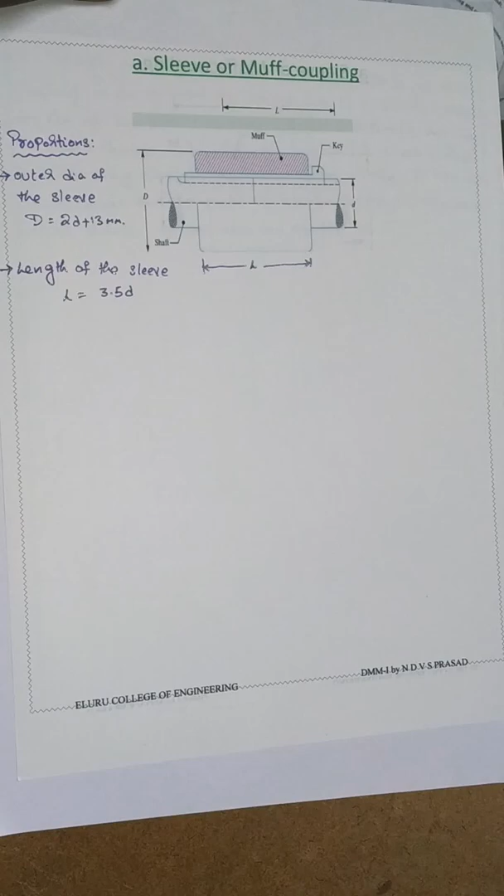Hello everyone. Today I would like to discuss sleeve or muff coupling. Here is the diagram of sleeve. This is called muff or sleeve.

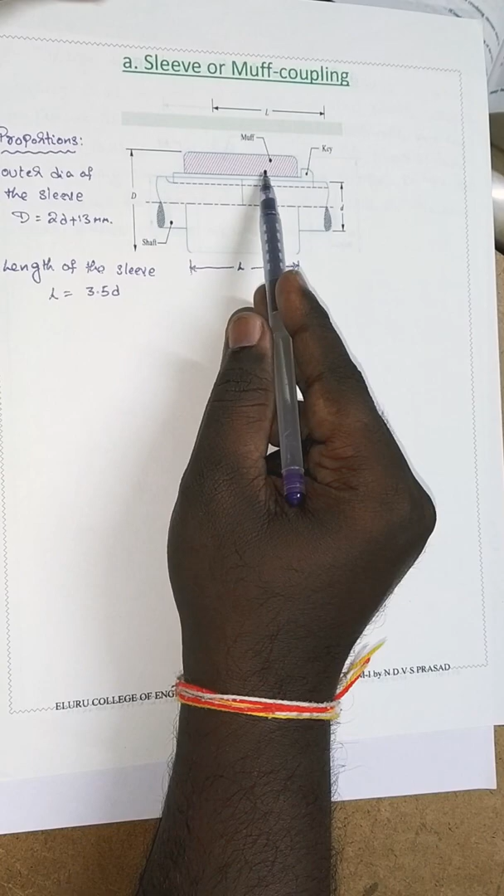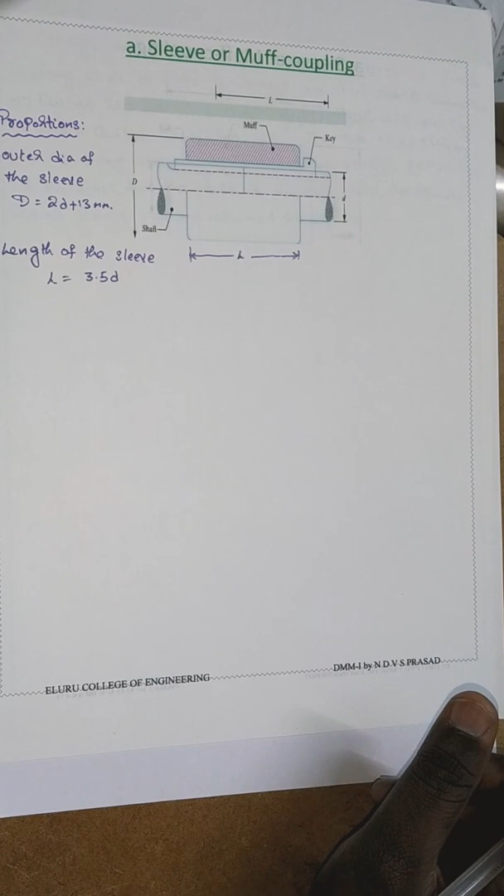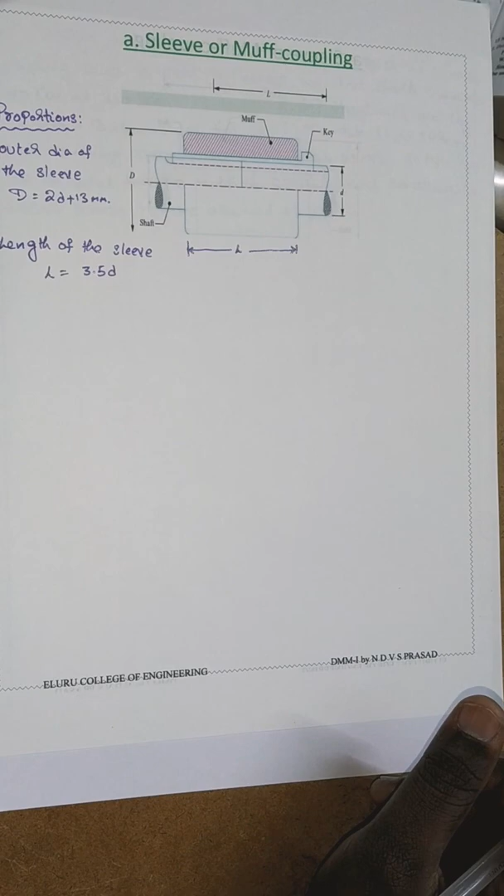There are two major parts. The first is the design part, the second is the verification part. In design part we have to design shaft, sleeve and key. After design is over, we check that the stresses induced in the key are less than or equal to the given allowable stresses. If the values are less than or equal to the given values, the key design is safe. The sleeve coupling is the simplest type of rigid coupling, made up of cast iron.

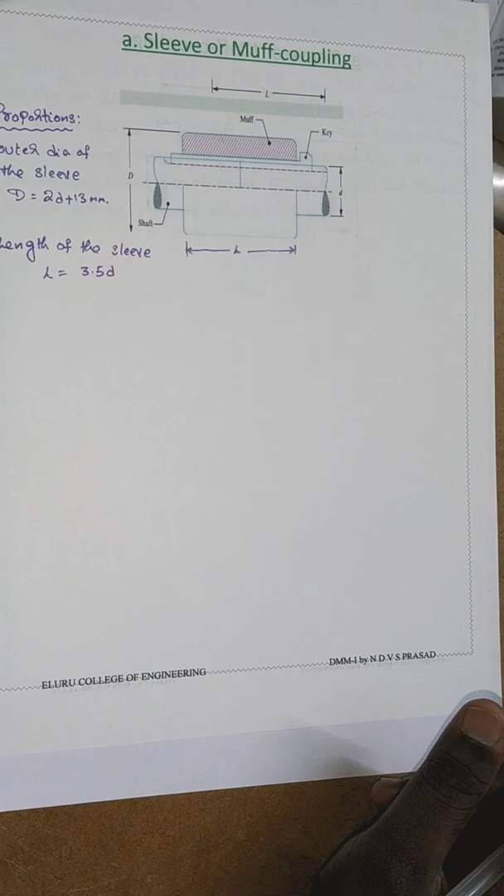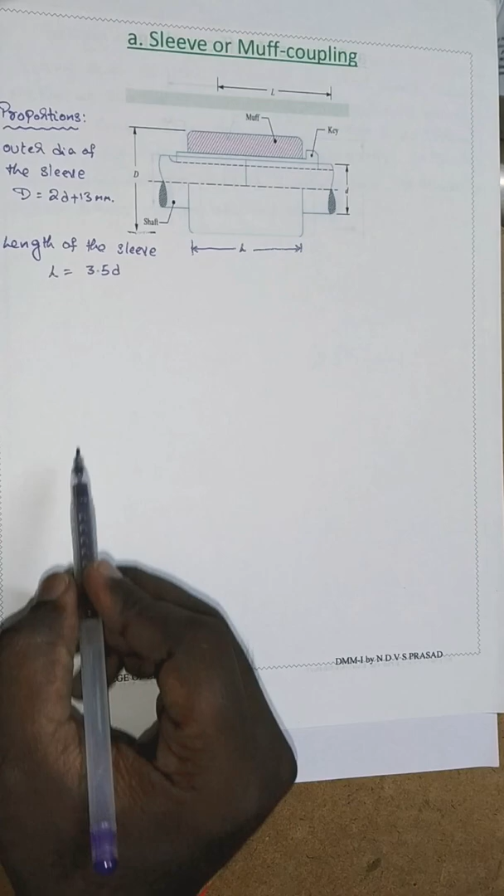It consists of a hollow cylinder whose internal diameter is same as that of the shaft. These are the proportions. The outer diameter, from here to here, capital D is equal to 2d plus 13. The length of the sleeve, L, is equal to 3.5d.

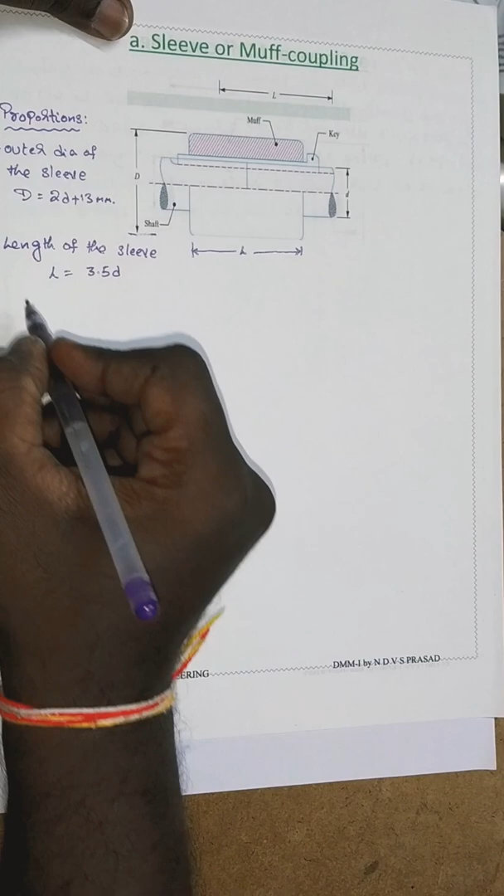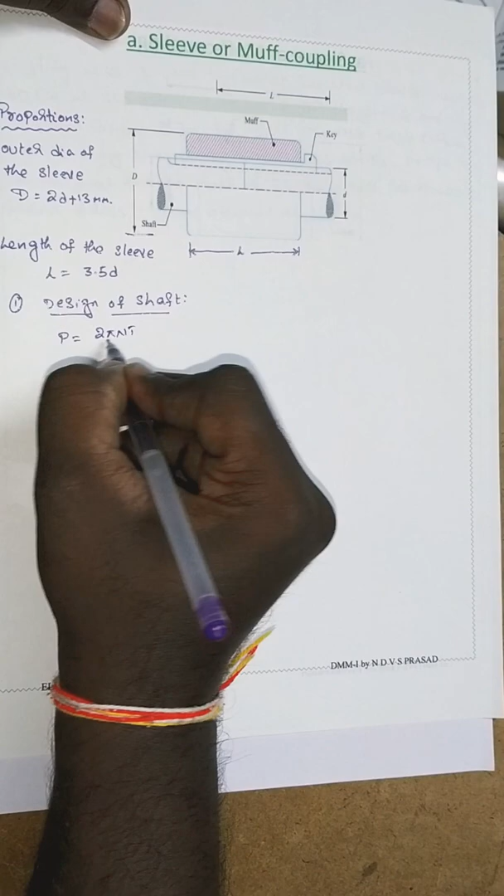First we have to design the shaft. We know the power equation: P is equal to 2 pi n T by 60. From this equation, we calculate the torque: T equal to 60 into P by 2 pi n.

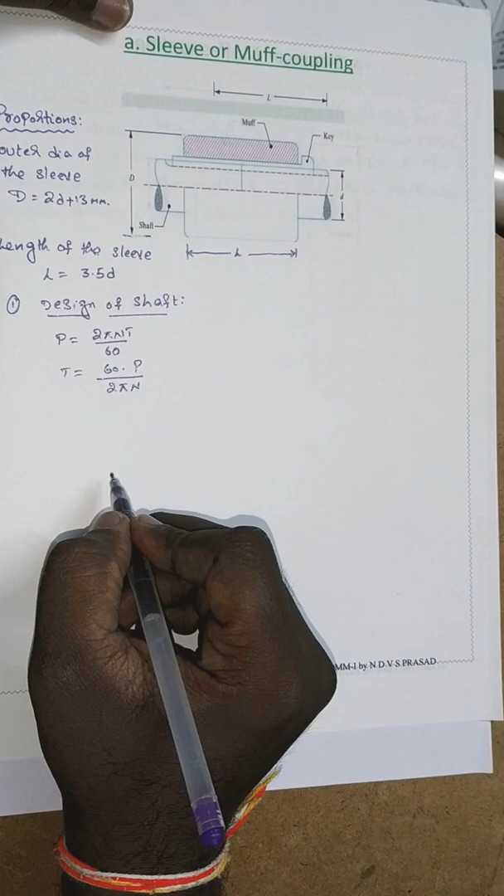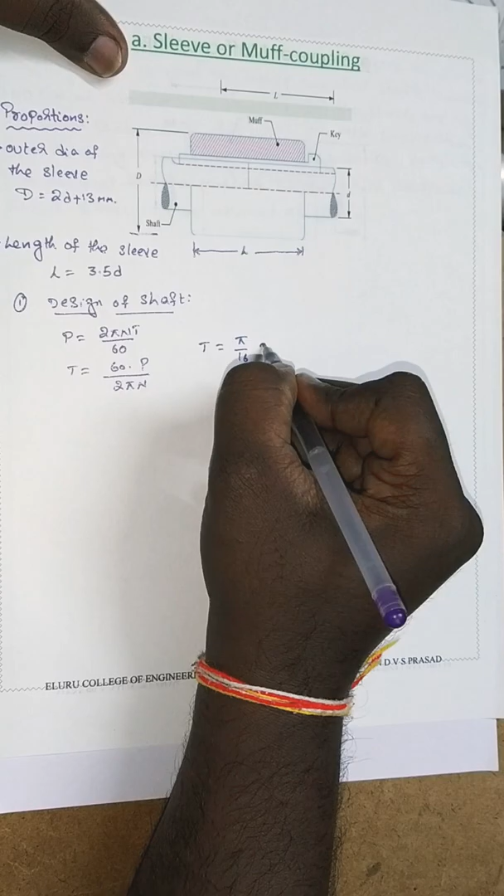We know the equation of torque transmitted by a solid circular shaft: T is equal to pi by 16 tau d cube, where d is the diameter of the shaft. From this equation, we find the torque value.

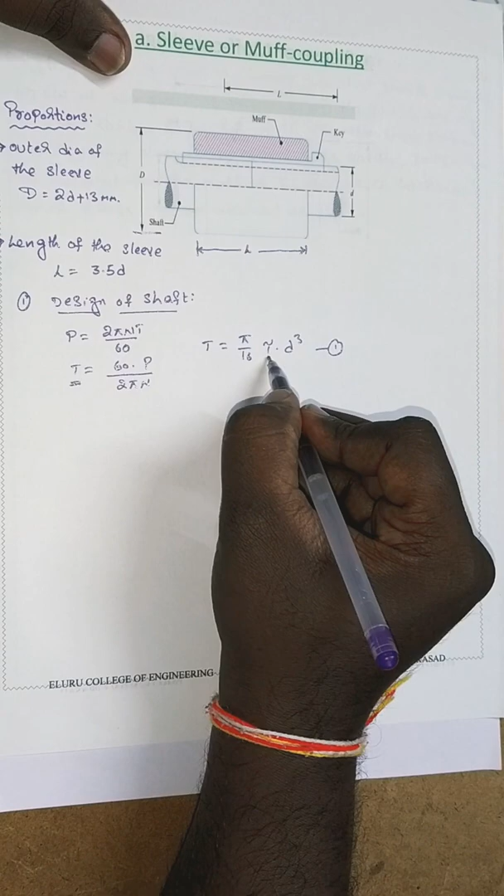After getting the torque value, substitute it in this equation to find either tau or d. While calculating problems, if tau is given, we find the diameter; or if diameter is given, we find the tau. This is the procedure for design of shaft.

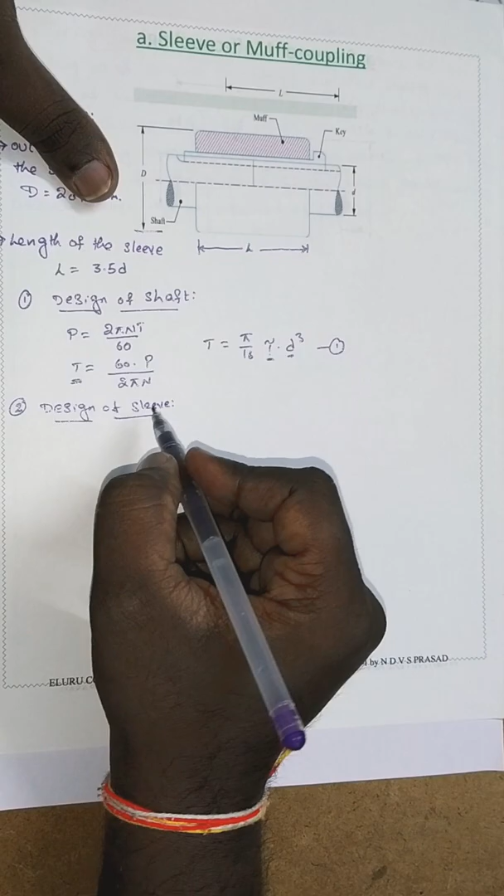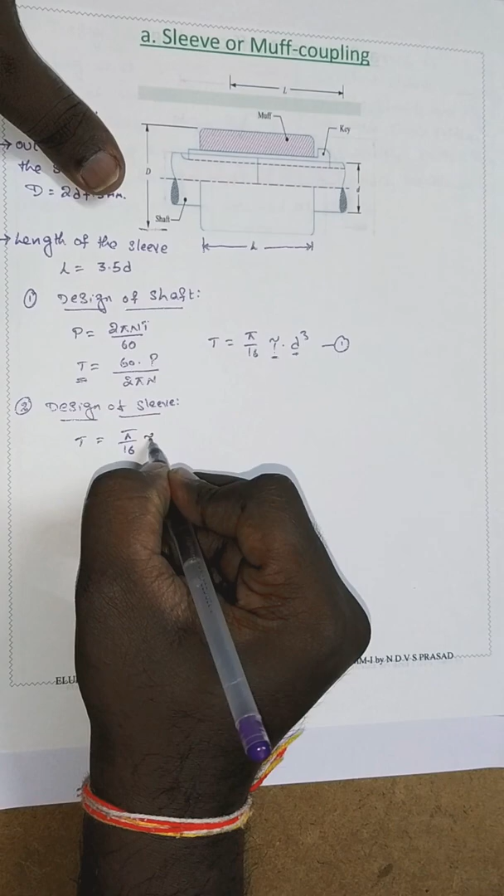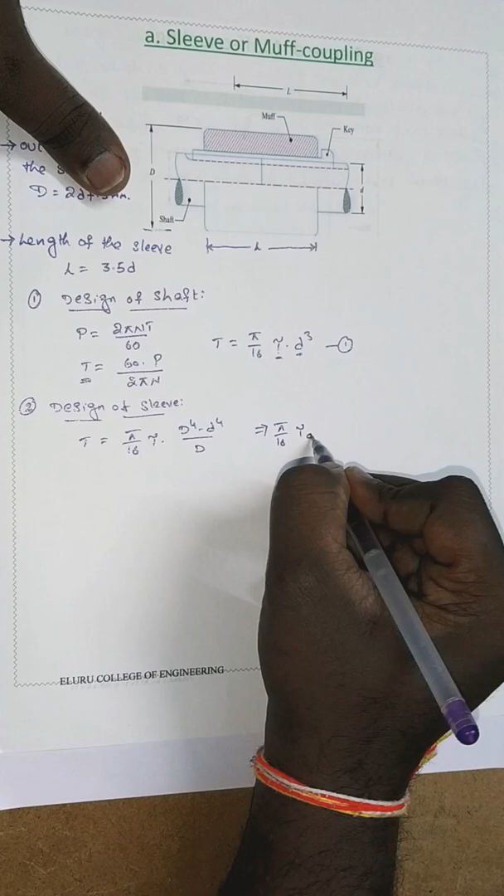Coming to design of sleeve. The sleeve is assumed as a hollow circular shaft. We know the torque equation for hollow circular shaft is pi by 16 tau (D power 4 minus d power 4) by capital D. In some textbooks this is written as pi by 16 tau capital D cube into (1 minus k power 4), where k is the ratio of small d by capital D.

In the problem, sometimes the k value is directly given. We simply substitute the value.

Next, design of key. The design of key is done by simply taking the proportions: width is equal to d by 4, thickness is equal to d by 6, and L is equal to capital L by 2, which is nothing but 3.5d by 2. Using these proportions, we find the key design.

From here, the design part is over. Next is the verification part, which is basically of two types: one for shearing, second for crushing. So check for shearing.

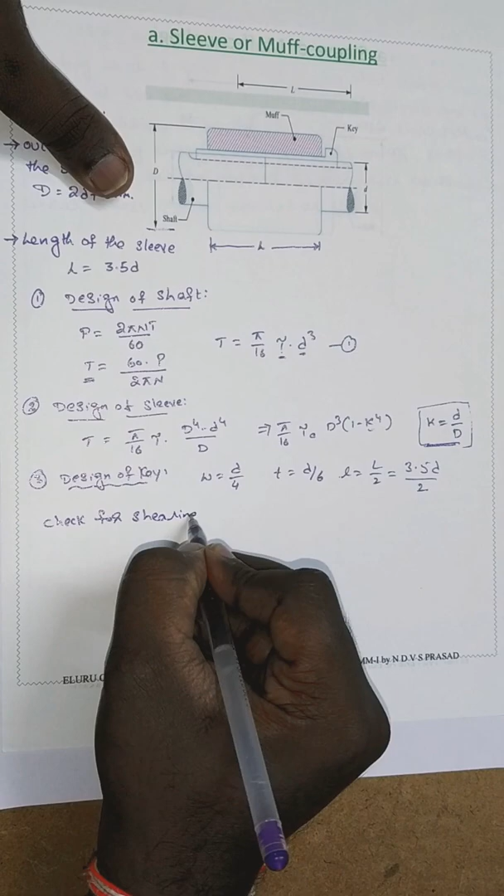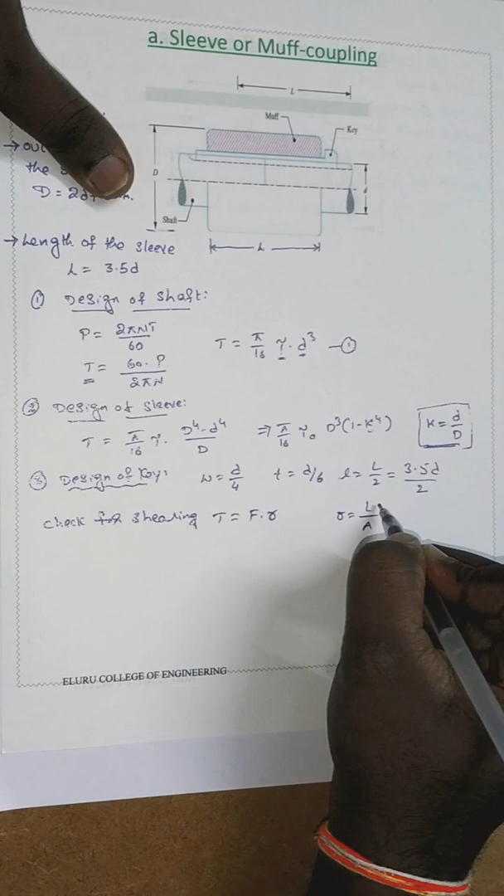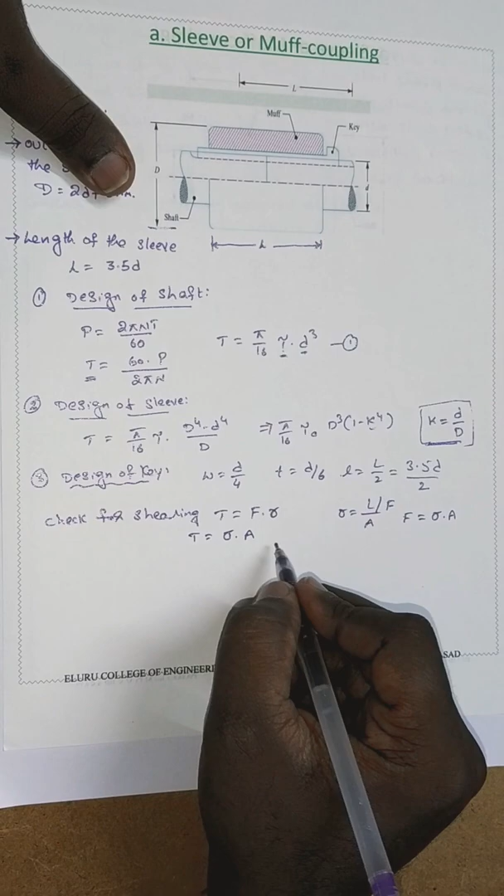Check for shearing. Generally, the torque equation is equal to force into radius. We know stress equal to load by area, or force. From this we get force is equal to stress into area, so T equal to stress into area. Here, stress is called the shear stress.

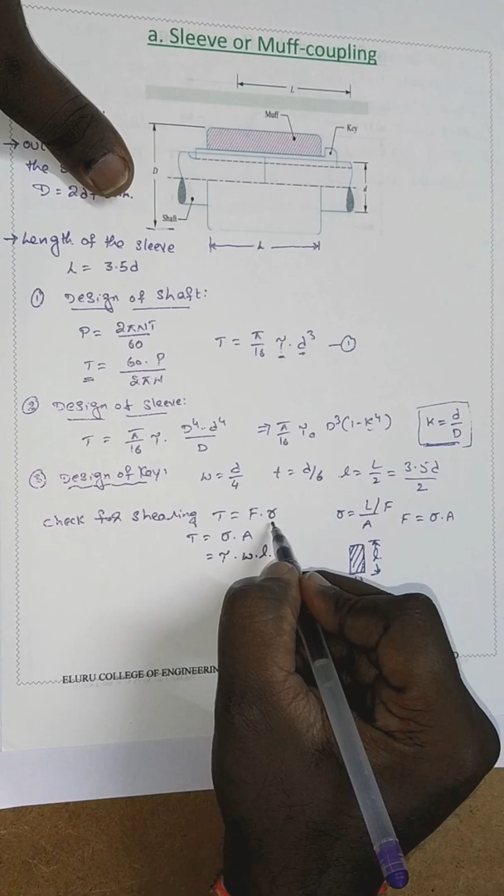Coming to area, the key element is here, with cross section like this — this is the width and this is the length of the key. This area will be affected while shearing. So the area is W into L. Coming to R, that is d by 2. So tau W L d by 2 gives the torque.

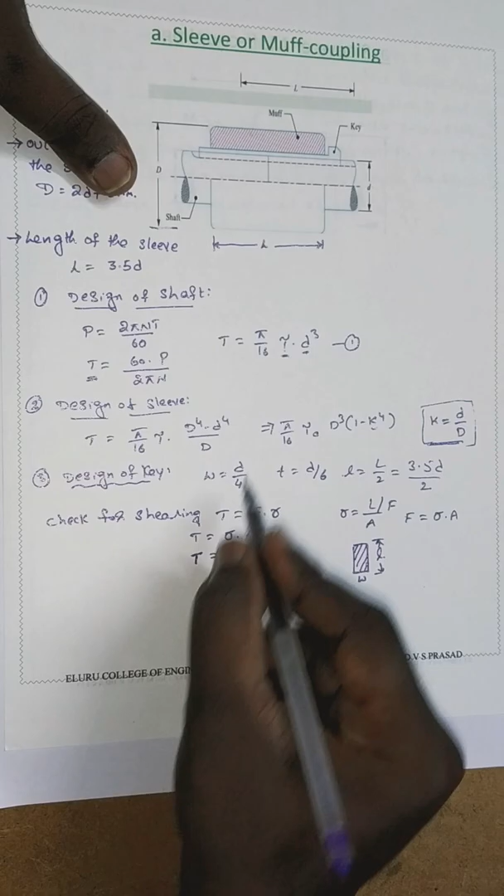The torque value previously found in equation 1 is substituted here. We check tau and substitute the W value, L value, and D by 2 value. The resulting tau value should be less than or equal to the safe permissible or allowable stress given in the problem.

Next, check for crushing. Here also torque is equal to force into radius, and force equal to stress into area — crushing stress into area into R.

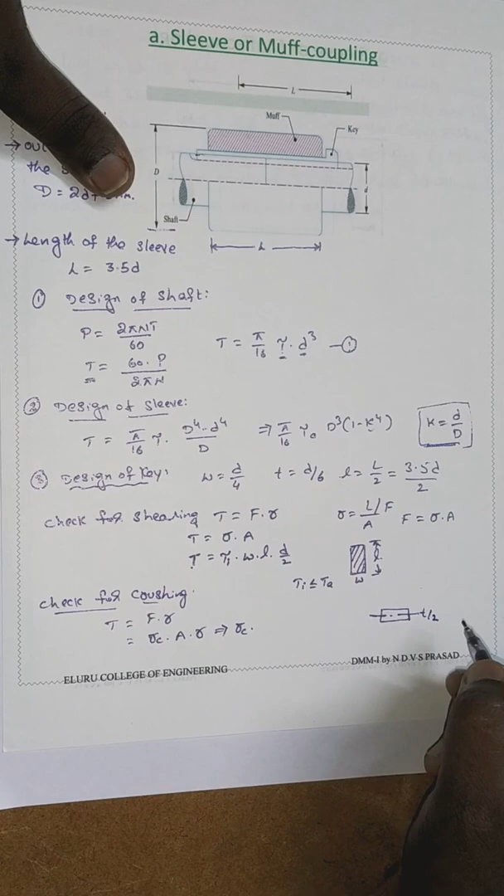Coming to area: the crushing area subjected to load is only half of the portion of the shaft. This is the half. The total value is thickness, but only in the half portion does the crushing area develop, that is T by 2 over a length of L. So the area is T by 2 L, and again R is equal to D by 2.

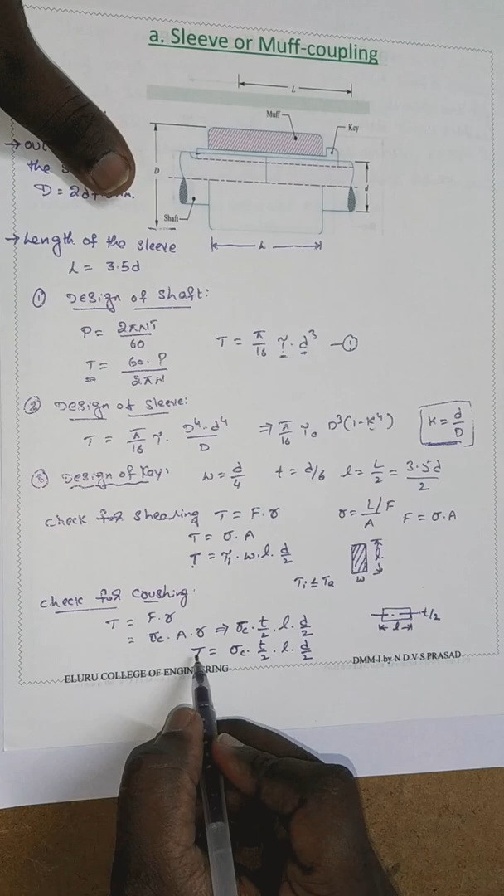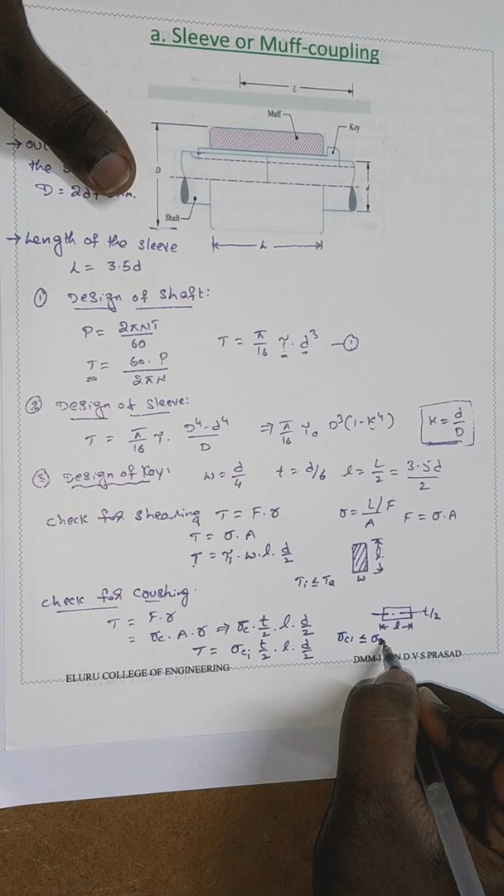Here this is sigma C. So finally T is equal to sigma C into T by 2 into L into D by 2. Substitute the torque value, thickness, L, and D values to find sigma Ci. Sigma Ci should be less than or equal to sigma Cs, where S is the safe permissible stress given in the problem.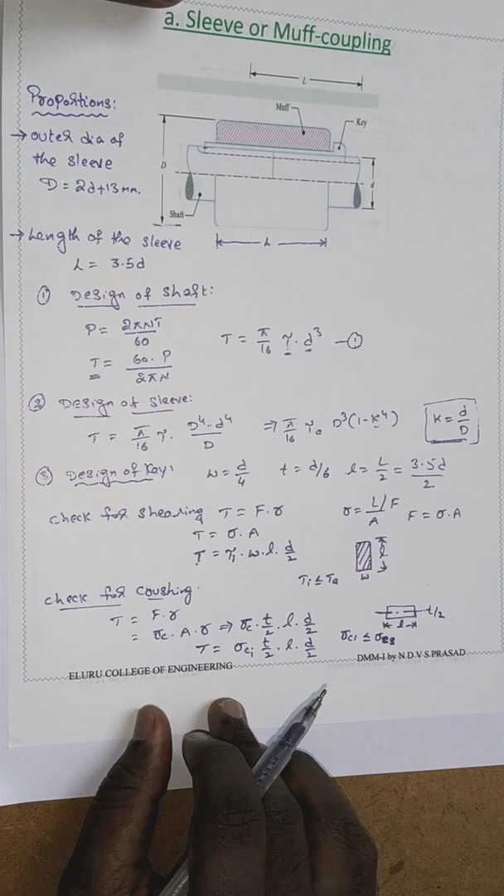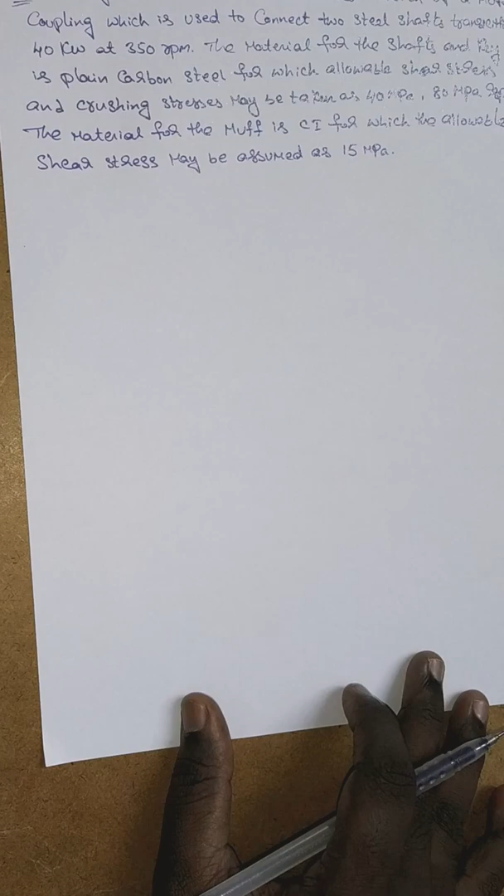Okay, so let us solve one example problem. Here is the problem given: design and make a neat dimensioned sketch of a muff coupling used to connect two steel shafts transmitting 40 kilowatts at 350 rpm.

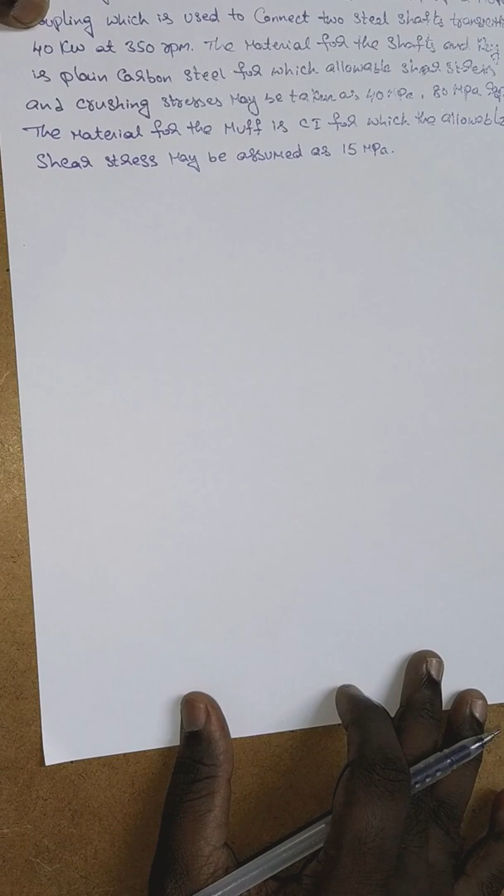The material for the shafts and key is plain carbon steel, for which allowable shear stress and crushing stress may be taken as 40 megapascal and 80 megapascal respectively. The material for the muff is cast iron, for which the allowable shear stress may be assumed as 15 megapascal. First you have to write the given data.

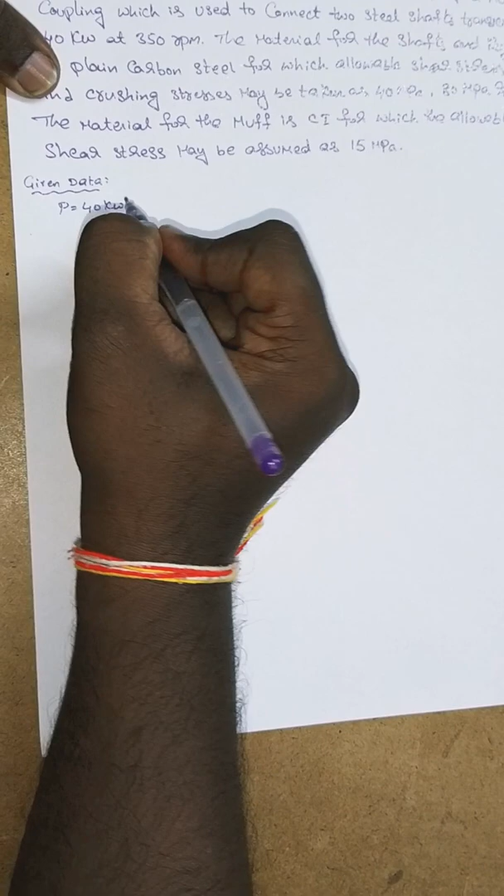Here power is given 40 kilowatt. We have to convert into watts: 40 into 10 cube watts. Speed is given 350 rpm.

Stresses are given: shear stress 40, crushing stress 80 megapascal. We have to convert into Newton per mm square. 1 megapascal is equal to 10 to the power of 6. 1 pascal is Newton per meter square.

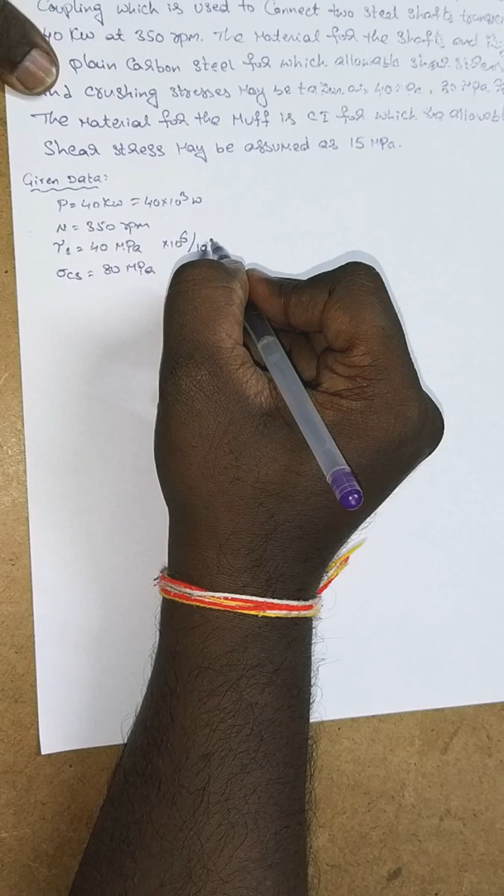You have to convert into meters. 1 meter equal to 1000 mm, 10 cube square, 10 to the power of 6. So directly 40 Newton per mm square, similarly 80 Newton per mm square here.

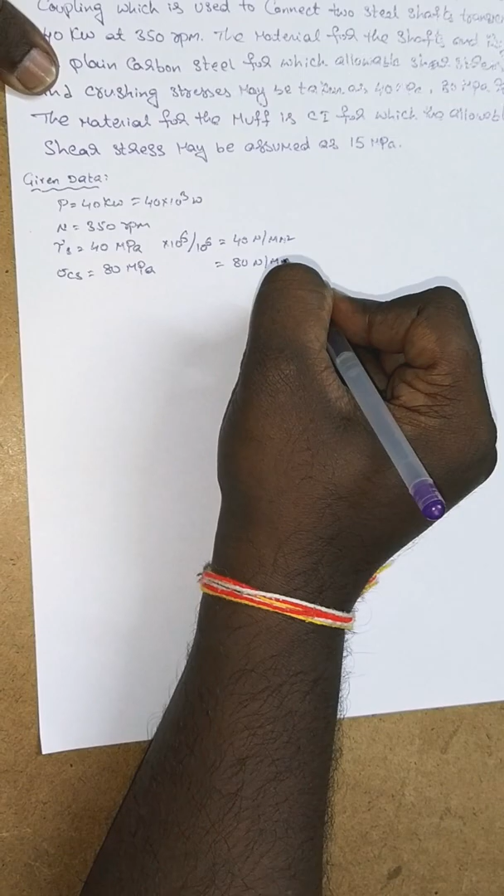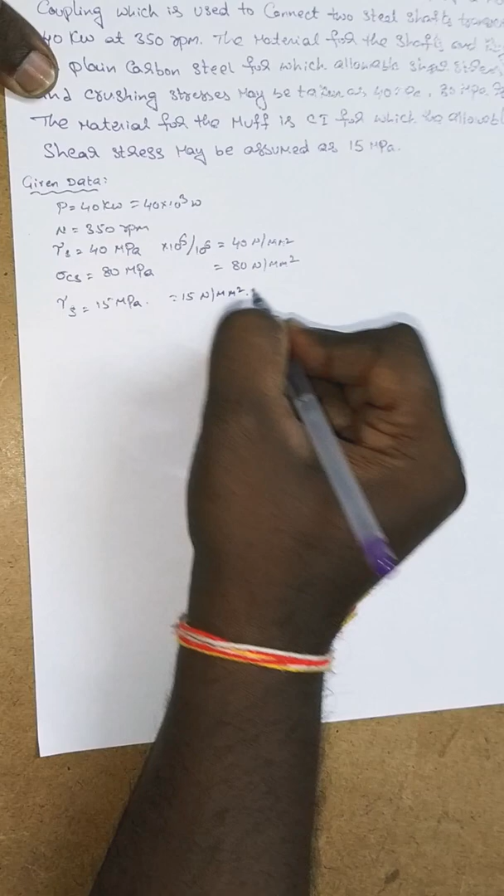And next, the muff cast iron which is allowable shear stress, muff material is given 15 megapascal. This is also 15 Newton per mm square.

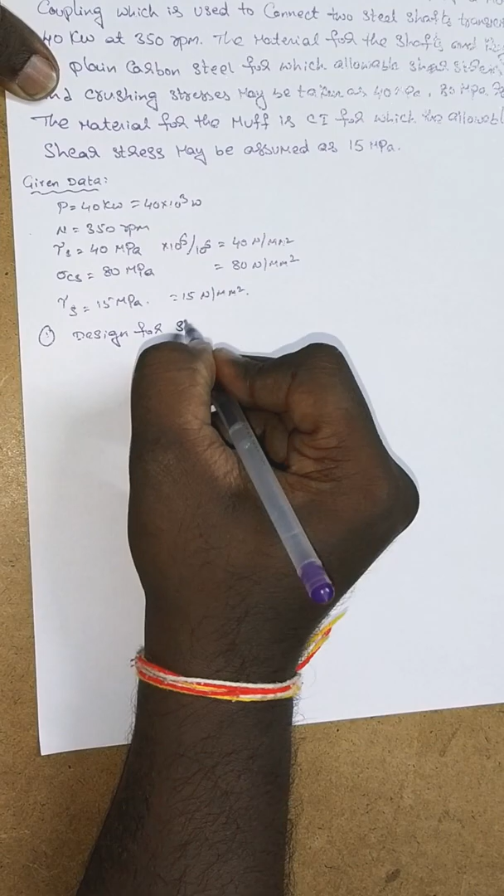So first we have to design the shaft. Design for shaft. We know the equation, torque equation is equal to 2 pi n by 60.

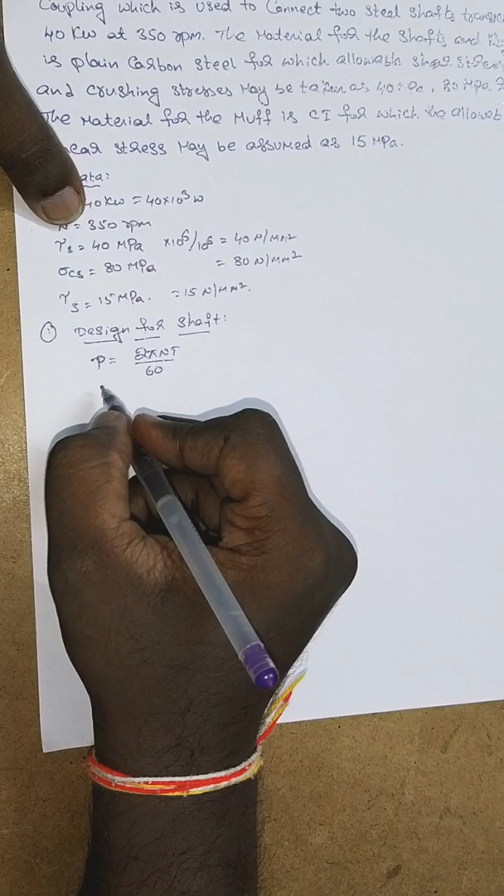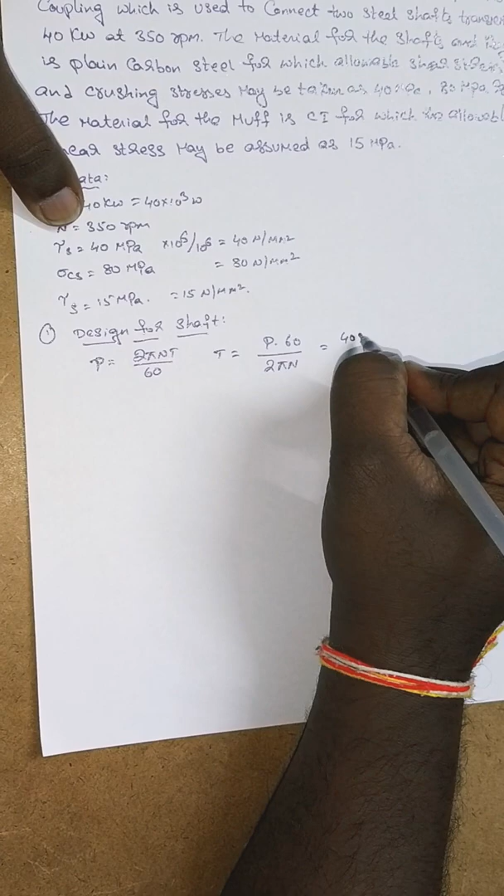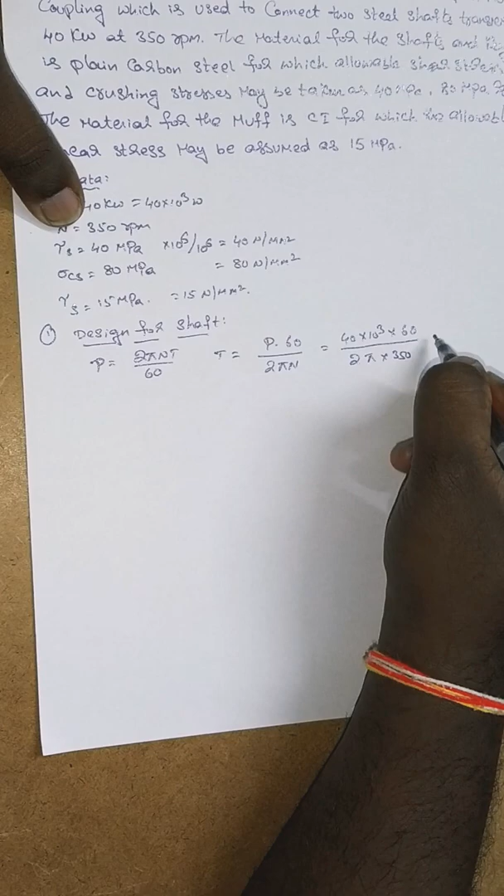Power is equal to 2 pi nt by 60. From this equation we have to calculate the torque: P into 60 by 2 pi n. P 40 into 10 cube, power value 40 kilowatt is given, into 60 by 2 into pi into speed 350 rpm. By calculating this we get

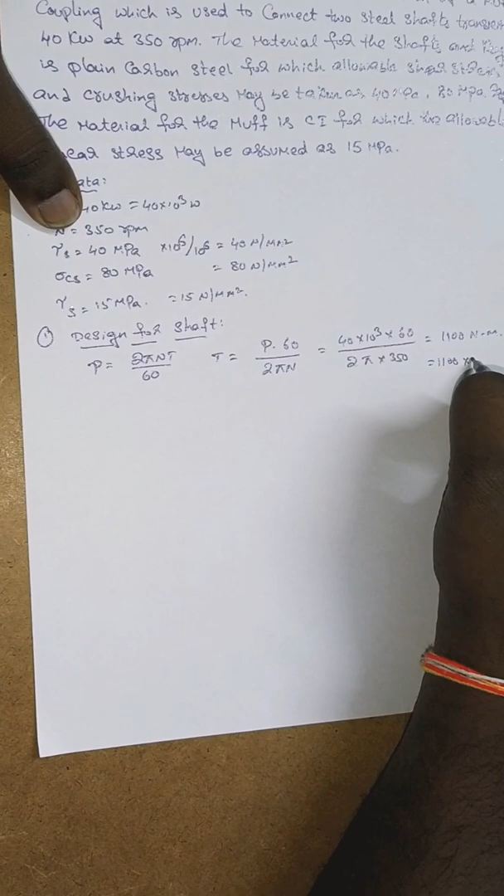1100 Newton meters. We have to convert into mm: 1100 into 10 cube Newton mm.

By using this equation, we have to find the diameter of the shaft. So T is equal to pi by 16 tau s into d cube. Torque transmitted for the solid shaft.

Here the torque value is 1100 into 10 cube is equal to pi by 16 tau s. Here 40 given, 40 Newton per mm square, 40 into d cube. By using this equation, you have to calculate diameter value. D is equal to 52, rounded to 55 mm.

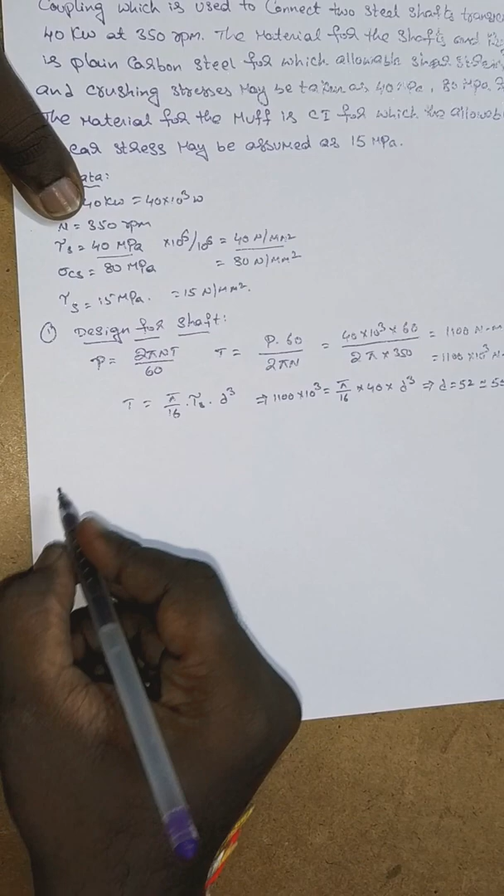Second one is the design for sleeve. Design for sleeve. Here while deriving the equation, we are having the proportions: Capital D is equal to 2D plus 13. 2 into diameter just now calculated 55 mm plus 13 is equal to 123, rounded to 125 mm.

L is equal to 3.5D is equal to 3.5 into 55 is equal to 192.5, rounded to 195 mm.

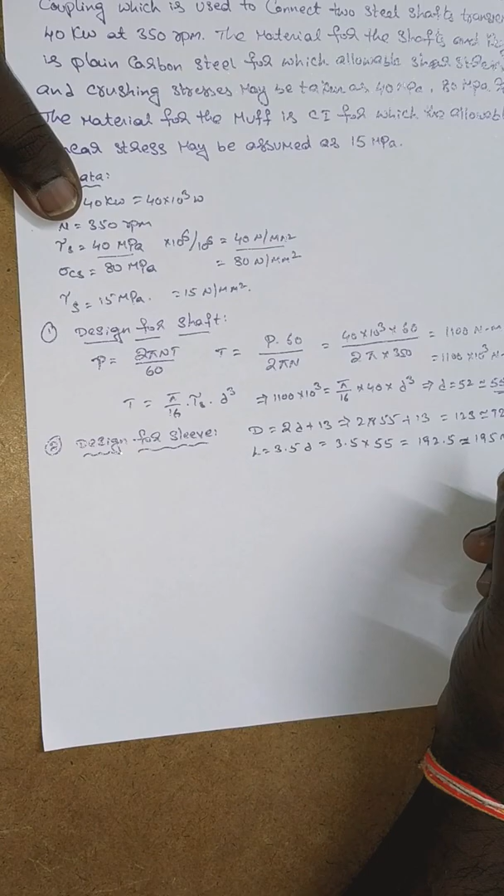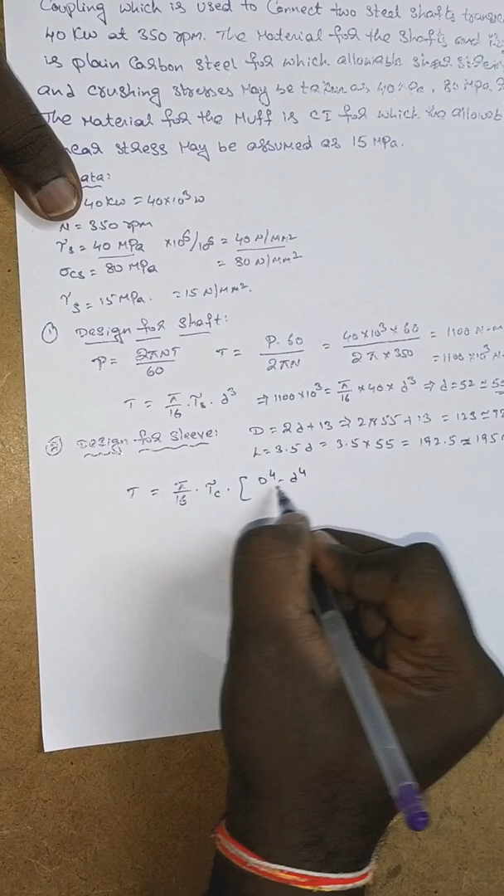Here we have to check the induced stress in the muff. What is the equation here? Torque transmitted hollow shaft, here sleeve. Sleeve assumed as a hollow circular shaft: pi by 16 tau c, d power 4 minus d power 4 by d.

Here the torque value is 1100 into 10 cube is equal to pi by 16 into tau c. Capital D 125, small d 55, by 125. So from this equation you have to solve tau c is 2.97 Newton per mm square.

Here the value is given 15. So this value is less than 15. The design of sleeve is safe.

Next, design for key. According to the standard tables, with respect to the diameter of the shaft, the key values can be taken: W is equal to 18 mm. Here we are having one equation.

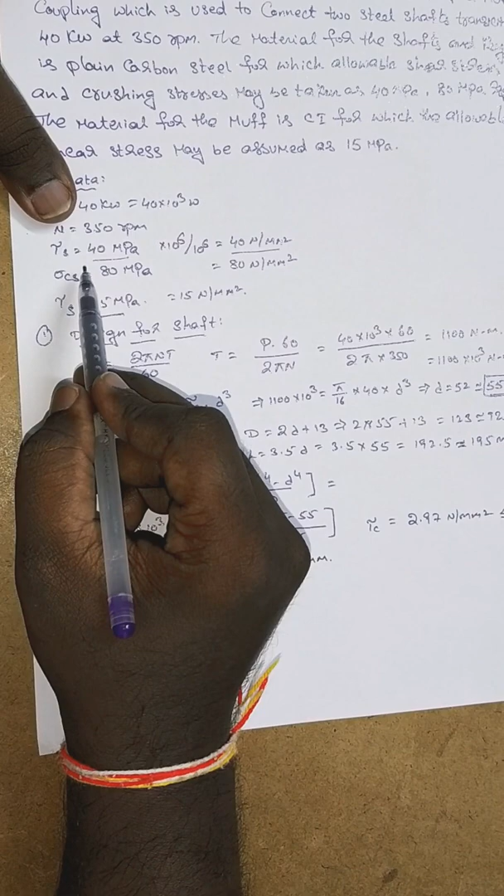The crushing stress is double the shearing stress. So by using these values assumed as a square key, that means thickness is equal to width is equal to 18 mm. L is equal to capital L by 2.

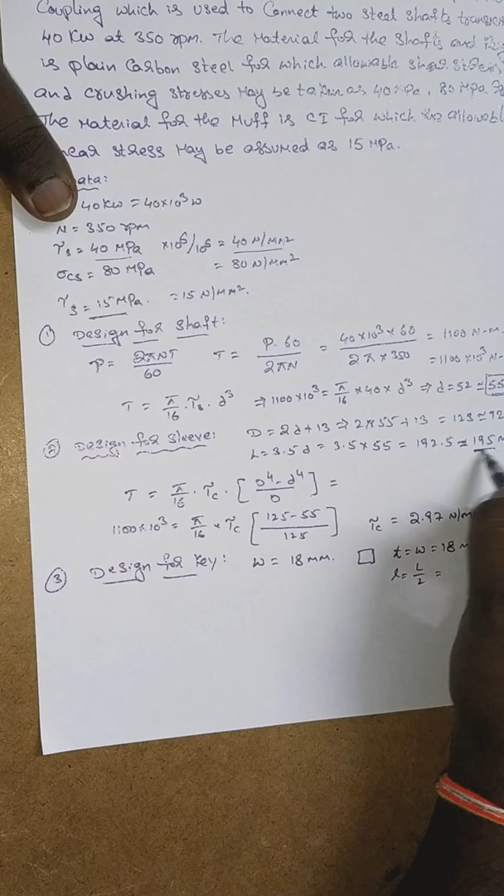So capital L is 195, 195 by 2 around 97.5 mm. So from here the design part is over.

Now verification part. First check for shearing. So the equation is torque is equal to tau into WL into D by 2. So previously we calculated torque value, W, L and diameter value.

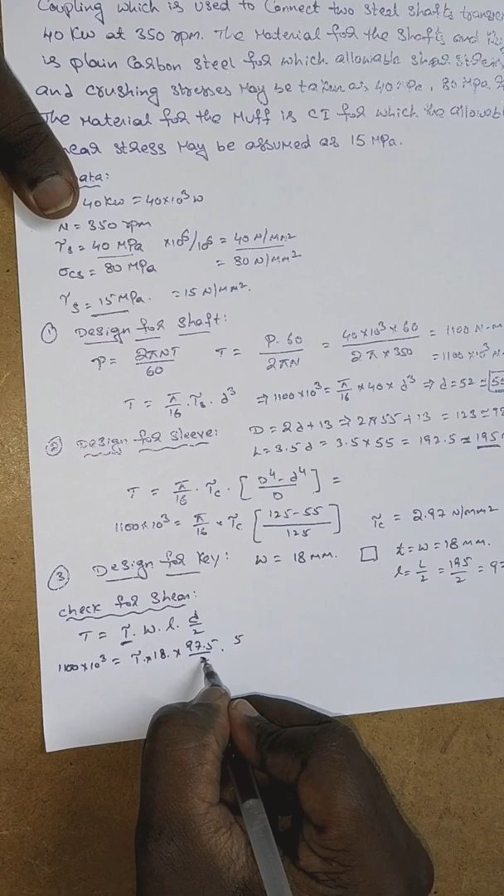Substitute here, check for the shear. Torque value 1100 into 10 cube is equal to tau into W 18, L 97.5 by 2 into D, L 97.5, D 55 by 2. So by calculating this equation,

around 48.2 into 10 cube tau s. The tau s value is 22.8 Newton per mm. Here what is the given value? 40 megapascal. So is 40. So shearing is safe.

Check for crushing. What is the equation we are having? T equal to sigma c, T by 2, L, D by 2.

Check the crushing value. Here T 18 by 2, L 97.5, 55 by 2. By solving this equation we get 45.6

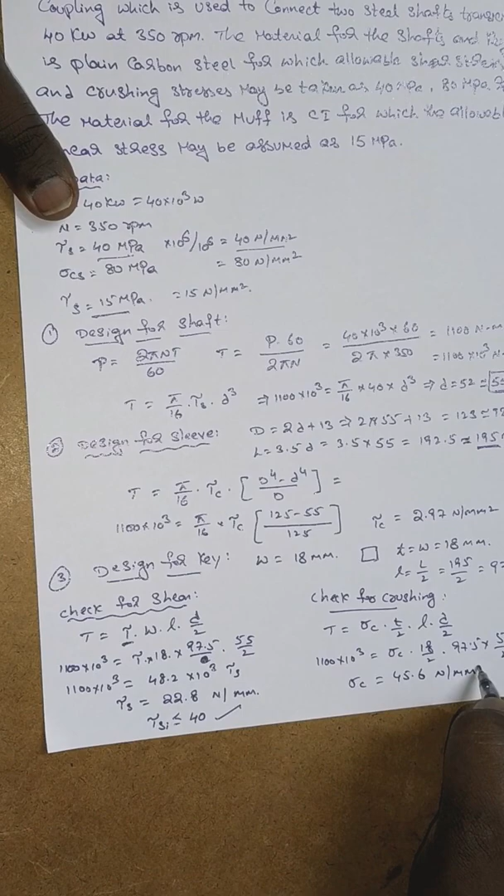Newton per mm square. The given value is 80. So crushing also safe. This is a procedure for